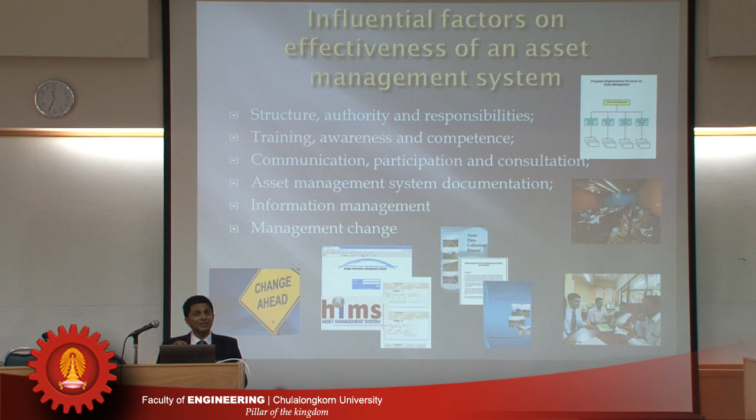Decisions are made by very professional engineers by judgment with engineering knowledge. That is very subjective. One person to the other person is different. I have maybe 25 years experience, another person has 30 years. Both have different opinions. But if you work along with the real information, condition data, things like that, it won't go wrong. Because both of us are subjective, but we are taking decisions in a very objective manner. So that's why asset management is important. It's based on information.

Asset management is a very big picture: it is holistic, systemic, establishes a governance structure, sustainable and risk-based. I'm going very quickly on these ones. It's holistic because asset management has every component in it: management, engineering, information, everything. So if you have all those things together, it's sustainable, it has to last forever. You can't have a structure today and it disappears within 3 years. You have to continually do it.

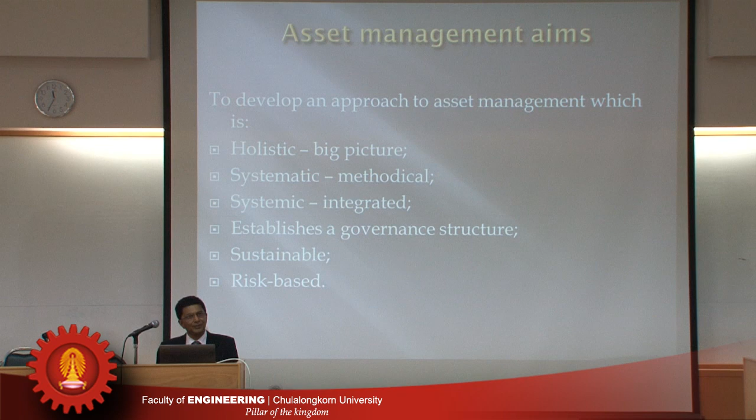And also these days, what is called risk-based. The higher the risk, the more quickly you have to respond. All decisions are risk-based. Benefits of adopting: I'm not trying to go through all of them, but it's clearly defined service level objectives, prioritized investments, and the decisions you normally take as a professional engineer. But if you do it with the information, it's very transparent.

If your politician comes and asks, why did you decide like that? You have an answer to give, because it's not your own opinion, it's your opinion as well as the real information. So that's why it's important. Those are the few things I want you to know. But anyway, it's ultimately optimization of agency cost. We are optimizing the cost of the investment here.

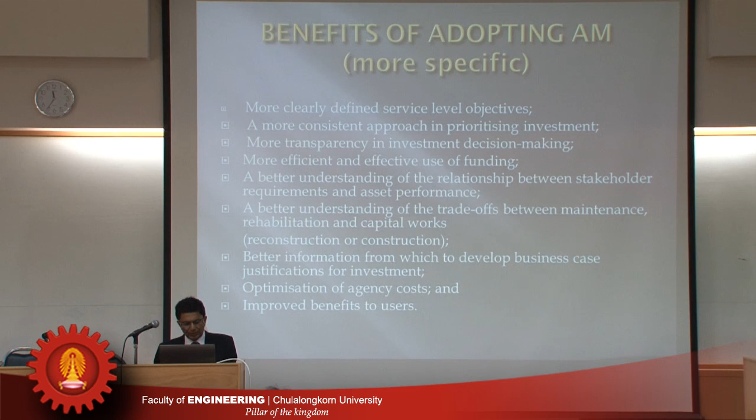Benefits from PAS 55. They have identified very different ones, what's called customer satisfaction. Through the asset management system, you can achieve customer satisfaction. You have the ability to demonstrate best value for money. If you have an information base, if you have computer systems, you can demonstrate to politicians or whichever funding agency why you are doing it like that.

And also optimize return on investment. As I mentioned previously, you have to have a return on your investments. So asset management systems provide that opportunity. And also, a very important thing in asset management is it's not today's program or tomorrow's program, not decisions about today's issues. When you think about today's issue, you have to think about the next 20 years. My solution is not only for today. It has to last for 20 years.

That's what asset management means. Most of the maintenance engineers, I'm not criticizing, but if you have a pothole, you just go and patch the pothole. But if you know the real information, that the pothole is because of pavement failure, probably you don't have to do pothole patching. You come and reconstruct the whole section rather than the pothole, because today pothole patching, tomorrow another pothole, the day after another pothole, because it's a pavement failure.

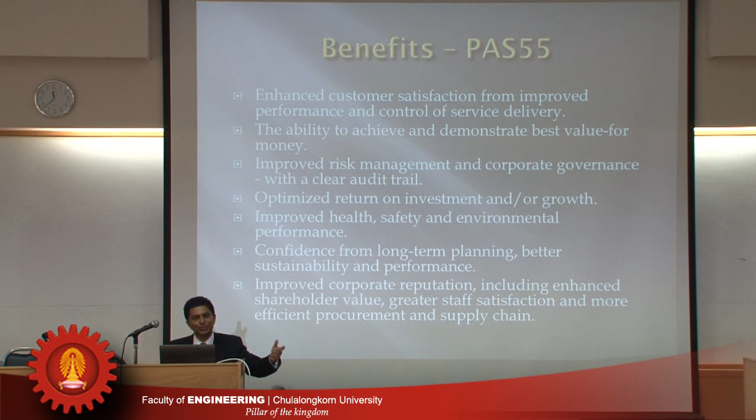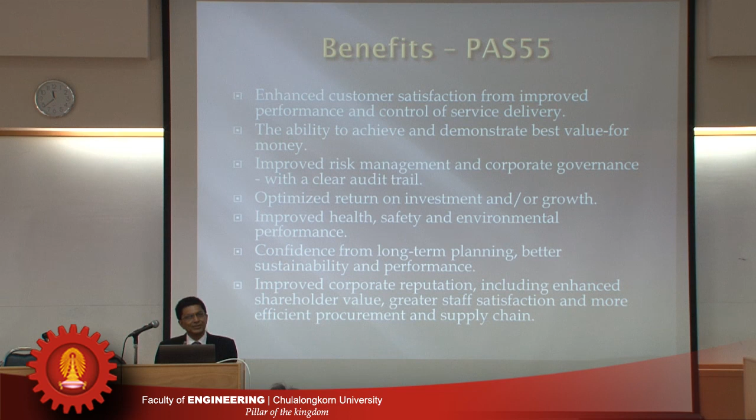And what I have understood is when you set up asset management properly in an organization, your organization's reputation will be improved because you are not biased for anything. You are systematically taking decisions. Systematically in the sense of information based.

That gentleman talked about this one. I took these photographs in Sri Lanka, right? I developed all this system for this one. This is an expressway. So why I put these is that pavements are not the only assets in the infrastructure. You can see road signs, road marking, lighting, bollards, raised pavement markers, line marking, fences, drainage, guardrails, all you have to maintain. Because pavement designers and pavement engineers concentrate only on pavement. But when you come to the operation situation, these other things are important as well.

If you don't have good drains, what will happen? You destroy your pavements. Whatever the proper designs, best aggregates, best construction method, it won't last long. So you have to think about the composite, everything. If you don't have line marking properly, you have safety issues. So you have to think about those as well. So I put one slide just to highlight that. Don't think pavement is the number one asset in road infrastructure; all the other important components are also there.

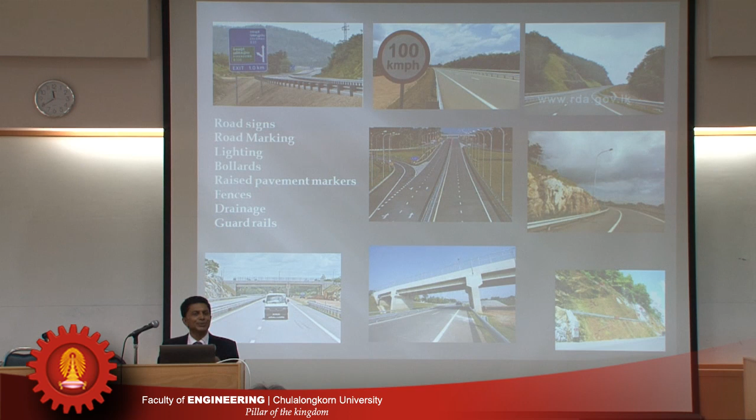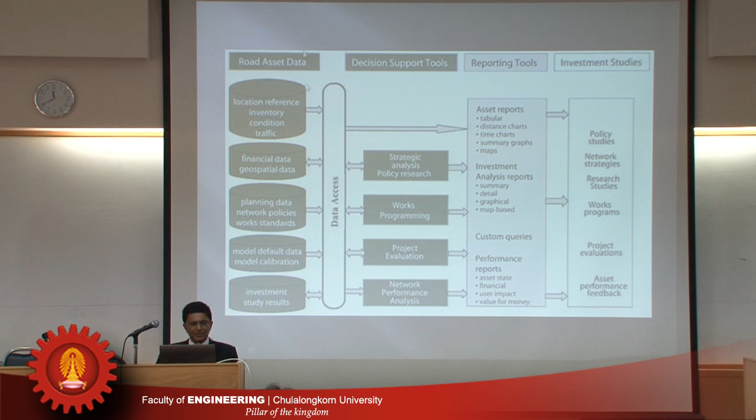So I come to the pavement management system. I think a lot of people are familiar with the pavement management system. This diagram is the one I would like to highlight. The whole thing is put into one diagram. If you see in the first column, location references, inventory, condition and traffic. All this information has to be incorporated in your databases. And financial data, geospatial data, planning data, network policies, works standards, model default data, model calibrations.

Anybody know about these? Who is doing pavement management? Are you sure? The university has developed a pavement management system. I heard this morning they have developed it in a proper way, but they said it's not a very complicated system, but it's a good system to start with. Complicated systems have a lot of models, integer programming, all kinds of things built into the system, but it's too complicated to come to that stage. It takes some time, but if you have an information base, at least that's a good start.

And also you have analytical tools. So this diagram says it's all in the database, and you develop what is called strategic analysis, works program, project evaluation, network performance analysis. These are all reporting. So these are the basic things in the pavement management system. I'm not going to go into detail, but if there's any other opportunity, we can discuss anything if you want, right?

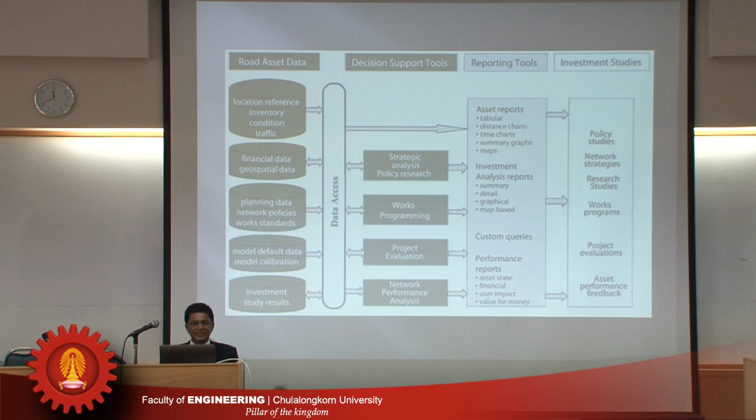So asset inventory. Have you heard about asset inventory? Everybody knows about asset inventory. But what we want is not only that we know the asset inventory, but it has to be recorded. It has to be updated. Every time the inventory changes, you have to update. Then you have information, right?

It's a database. You have road features, what's the width, what's the length, that kind of thing. And what are the pavement thicknesses, what are the pavement material properties, all kinds of things are recorded in one database. That's called road inventory, asset inventory. Asset inventory means beyond pavement. That means signs and everything are incorporated into one database.

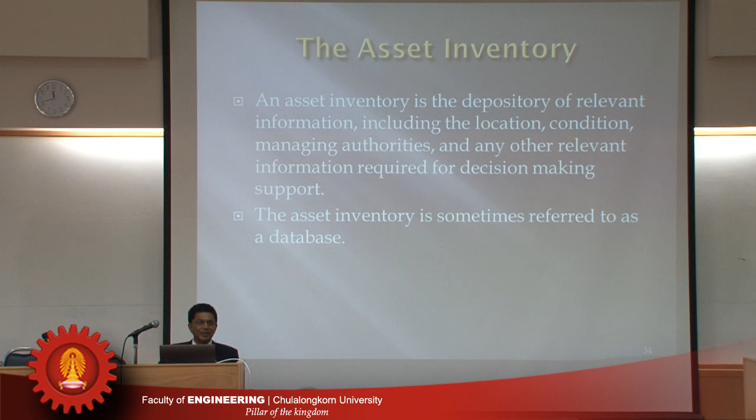Pavement condition monitoring. Who is doing pavement condition monitoring at the moment? Don't say no, you should do this. I think everybody knows. Pavement maintenance engineers always have in their mind what the pavement condition is, but do you monitor regularly and record it? Is anybody doing it? I think somebody might do, must do, because this is the fundamentals of asset management.

Because once you open any asset for operation, you have to monitor its performance, what's happening from day one. So in Sri Lanka, before opening for operations, I checked the conditions. What is the pavement structural condition? What's the functional condition? What's the surface condition? Then you know from day one what will happen, how it deteriorates. That knowledge has to be developed. So pavement condition monitoring is very important.

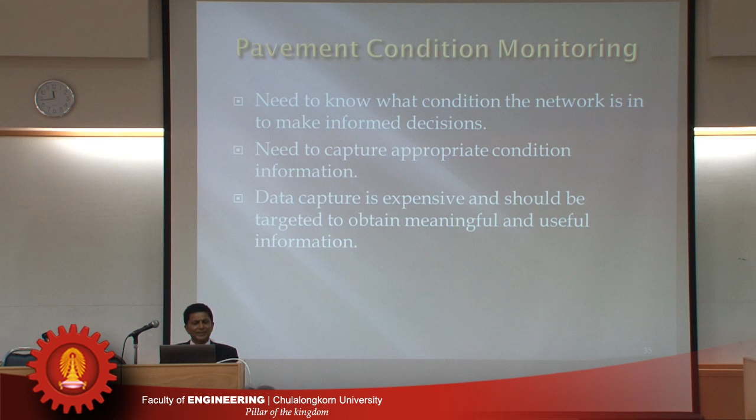So these are the types you are monitoring: roughness, rutting, cracking, surface texture, skid resistance, pavement strength. I put two in dark colors, skid resistance and pavement strength. Those are the areas where I am going to touch on research and development, what we have done, because other areas people generally know. It's not very complicated, but skid resistance and pavement strength are the most expensive data collection. So because of that, we have to optimize your investment. So my research is based mostly on skid resistance and pavement strength.

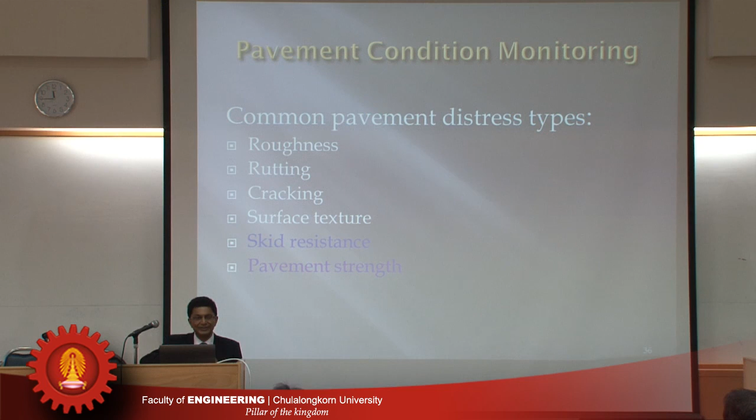So these are the equipment we use to collect the data. You would have seen these ones. Now I can see some of the smiles coming, so you are familiar with this one. Have you seen the profilometer? That collects roughness, rutting, texture, everything. And this one is measuring pavement strength. And this is the same equipment as this one.

Then you have a ground penetrating radar, but it is not widely available. You can see the pavement layers in these kinds of graphs. But it is not a common practice. Still, the technology is not that advanced. This is the one I was talking about yesterday, pendulum testing, but I'll show you some of the other equipment we use for skid resistance later.

So even these equipment are a little bit old now. This kind of equipment has been used for the last 10 to 15 years in the world. Australia is producing these kinds of vehicles worldwide. Even recently Sri Lanka purchased one of these for $1 million. So it's quite a reasonable price now.

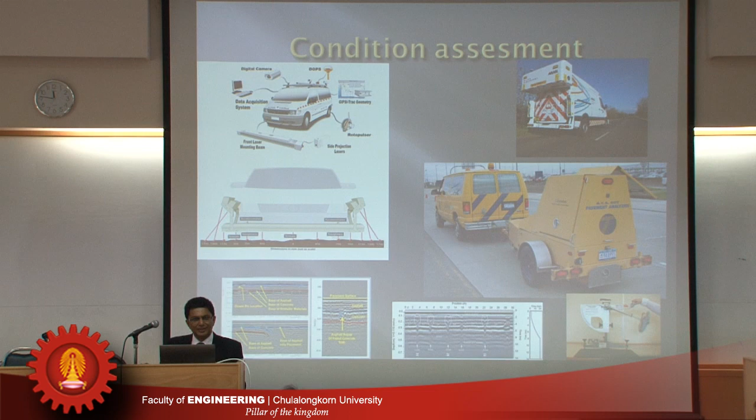But these are the new equipment. Can you see the top right hand corner? This is the experiment I did. This is called the traffic speed deflectometer. This yellow equipment measures pavement strength at every 100 meter or 50 meter interval. You have to stop the traffic and do it. It's very expensive. But now the latest one is this one. This operates at 80 km per hour and measures pavement strength every 2 centimeters. Huge amount of data, very easy, cost effective. You don't have to control the traffic.

This is coming from Denmark. At the moment there are only 4 vehicles in the world. I brought it to Australia and did the testing on my network. I used this one to monitor 5,000 kilometers. So I'll show you some of the results later.

And this one, right down, is called SCRIM Plus. This is the one I was talking about this morning. This is the machine where you have a SCRIM, which measures skid resistance. And this also has other equipment similar to the profilometer. It collects roughness, rutting, texture as well as skid resistance. But both vehicles are expensive, closer to $2 million, and very expensive to operate as well.

Just before we get back, I'm curious why this equipment is built on trucks, not a normal car. What's the reason? The reason is this vehicle has to have an axle load of 9 tons. So you are replicating the weight. This is real performance as the 9 ton axle passes, how the deflection reflects. Otherwise, you have to develop new models.

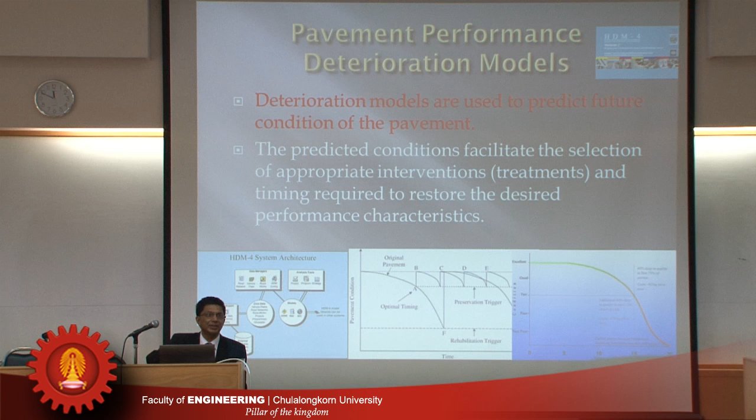And again, pavement deterioration models. Models are very important for pavement management systems. That's why we are collecting data annually. Then we develop profiles like this. These are called deterioration models, for roughness, for example, pavement strength. So we have to develop all these performance curves. Only then can you run pavement management systems and predict properly for the future. I'll give you some examples; this is another area where we did some research work.

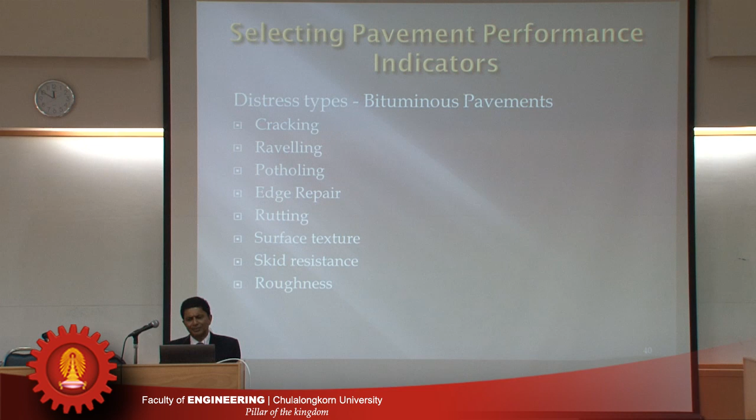Performance indicators, as I mentioned: cracking, raveling, potholes, edge repairs, rutting, surface texture, skid resistance. These are the areas you report to your management. This information has to be collected annually. In Australia, it is passed to management annually. Then management knows exactly what's going on and how it's performing. If one goes right down, management will ask what we can do to fix it. So this is information-based decision making. Performance indicators are very important.

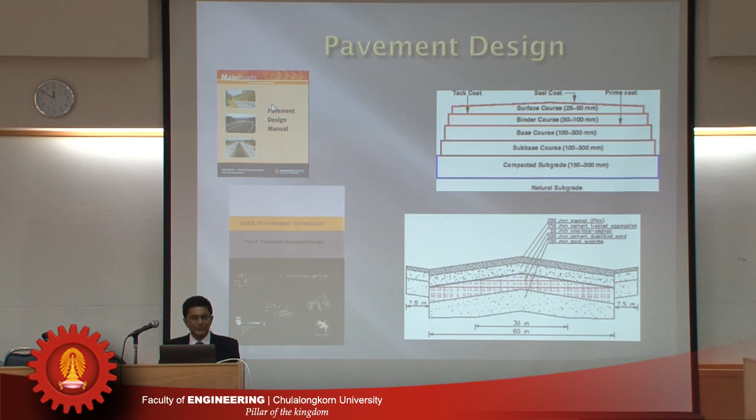Pavement designs. I'm not going to talk about it much. But pavement management systems won't do much unless you do proper pavement designs. So I just put this slide in to highlight that. And we have manuals, national guidelines, state guidelines, and also a lot of research.